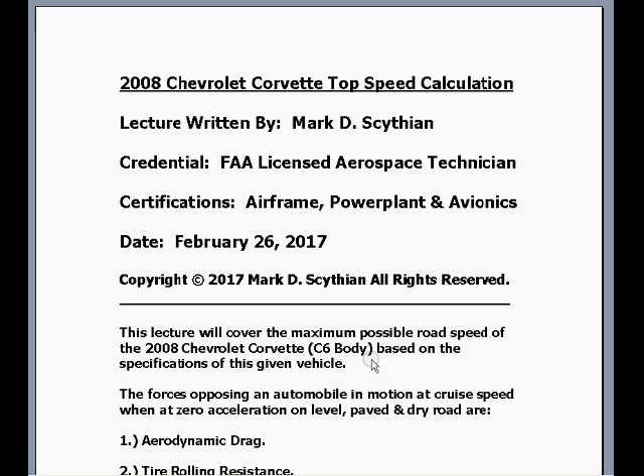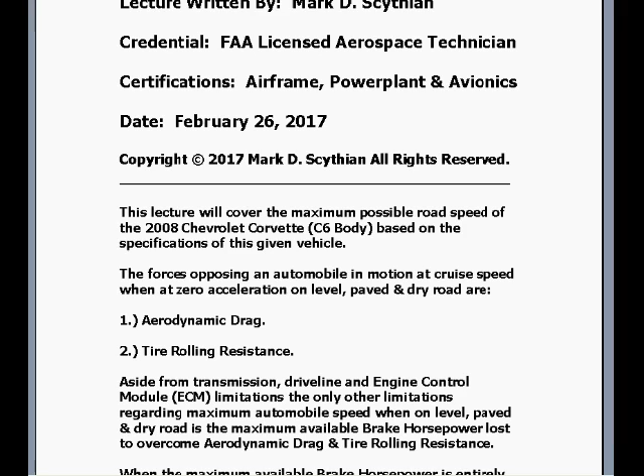The forces opposing an automobile in motion at cruise speed when at zero acceleration on level, paved, and dry road are aerodynamic drag and tire rolling resistance. Aside from transmission, driveline, and engine control module ECM limitations, the only other limitations regarding maximum automobile speed when on level, paved, and dry road is the maximum available brake horsepower lost to overcome aerodynamic drag and tire rolling resistance.

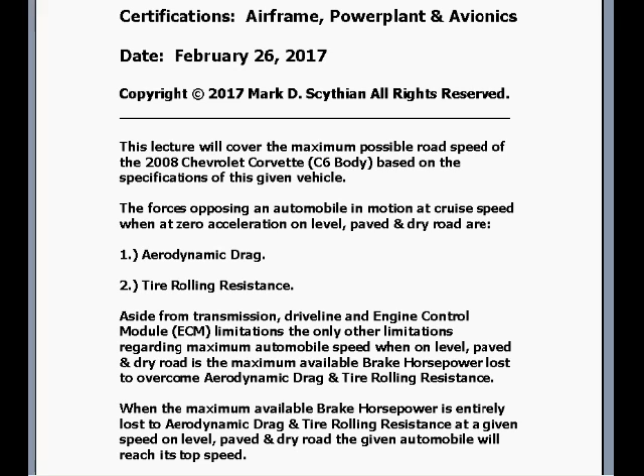When the maximum available brake horsepower is entirely lost to aerodynamic drag and tire rolling resistance at a given speed on level, paved, and dry road, the given automobile will reach its top speed. The 2008 Chevrolet Corvette specifications are as follows.

The 4-stroke gasoline piston engine is a 6.2 liter V-8 LS3 crate engine with a displacement of 6,162 cubic centimeters, cc's, a bore and stroke of 103.25 millimeters by 92 millimeters. There's 25.4 millimeters to 1 inch, so that translates to a bore of 4.065 inches and a stroke of 3.622 inches. The maximum torque output is 424 foot-pounds at 4,600 RPM.

Automobile weight 3,272 pounds. Coefficient of aerodynamic drag 0.286. Projected frontal area 22.3 square feet. The elevation above mean sea level operating condition will be 925 feet above mean sea level in an air temperature of 59 degrees Fahrenheit, 0 mile per hour headwinds, and the road conditions are level, paved, and dry.

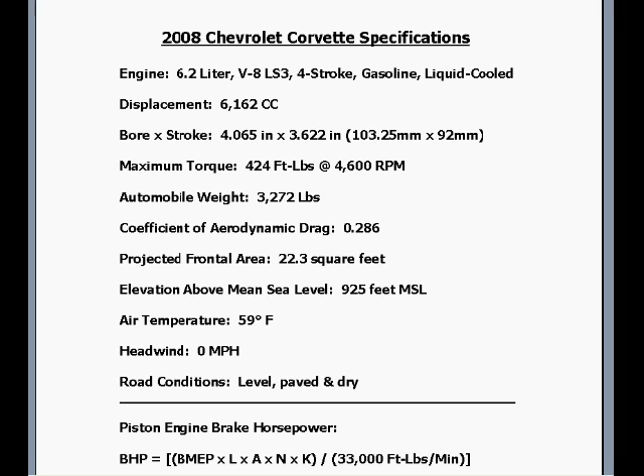So the first thing we have to do is calculate the maximum available piston engine brake horsepower, and the foot-pounds torque at given RPM is directly proportional to the brake horsepower, or the usable horsepower available at the crankshaft after factoring out all friction horsepower losses.

So we would start first with the brake horsepower formula for piston engine, which is the brake mean effective pressure in PSI times the piston stroke length in feet, L, times the bore cross-sectional area in square inches, A, times the number of power strokes per minute, N, times the number of cylinders, K, divided by 33,000 foot-pounds per minute, which is the number of foot-pounds per minute to 1 horsepower. We must use foot-pounds per minute because we're dealing with revolutions per minute, not revolutions per second.

BMEP, brake mean effective pressure, that's the pressure exerted on the piston during each power stroke. And in a 4-stroke piston engine, there's exactly 2 revolutions of the crankshaft for every power stroke. So the power strokes per minute will be equal to 1/2 the RPM. So the brake mean effective pressure in a 4-stroke piston engine is equal to 150.8 times the foot-pounds torque divided by the cubic inch displacement of the entire engine.

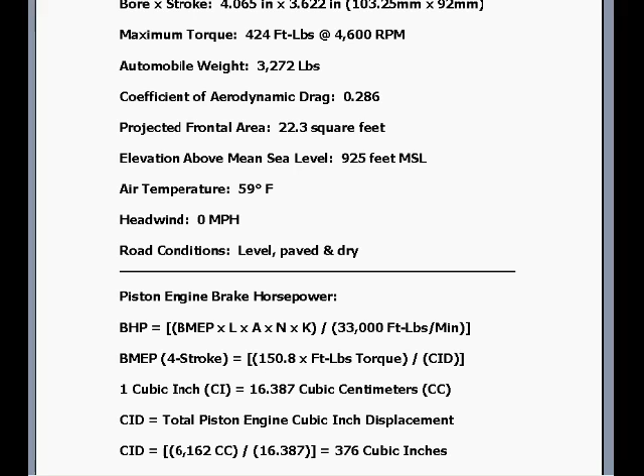1 cubic inch, or CI, is equal to 16.387 cubic centimeters, or cc's. So to calculate the CID, we would take 6,162 cc's and divide it by 16.387. So that translates to 376 cubic inches total engine displacement, which is also equal to 6.2 liters. 6.162 liters to be exact. 1,000 cc's to 1 liter.

So we calculate the brake mean effective pressure for the 4-stroke piston engine. In this case, it's 150.8 times the maximum torque output of 424 foot-pounds divided by a total cubic inch displacement of 376 cubic inches. So during each power stroke at maximum torque output, there will be 170 pounds per square inch of brake mean effective pressure.

Next, we have to calculate the piston stroke length in feet. So we take 3.622 inches piston stroke and divide it by 12. That would be 0.3 feet piston stroke to represent L. The A is represented by the bore cross-sectional area, which is equal to the bore diameter, 4.065 divided by 2 to obtain radius, then squared, then times pi. So the bore cross-sectional area, A, is equal to 12.97 square inches.

The number of power strokes per minute, N, is equal to the RPM divided by 2 in a 4-stroke piston engine. So since we're operating at maximum torque output, which is directly proportional to brake horsepower, we take 4,600 RPM, the RPM in which maximum torque is reached, and divide that by 2. So N is equal to 2,300 power strokes per minute. K is the number of cylinders, in this case 8 cylinders, V8.

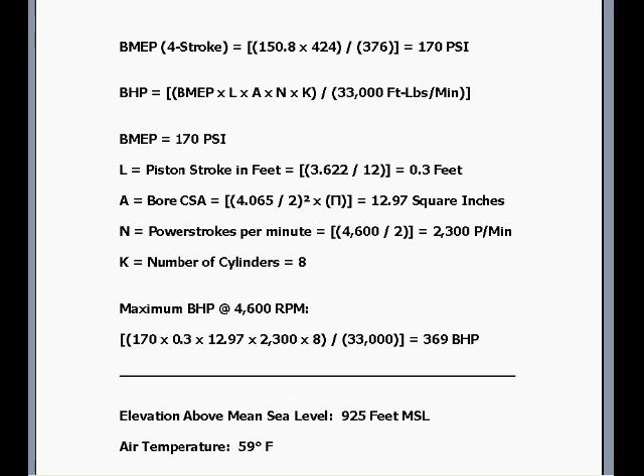So the maximum available brake horsepower at 4,600 RPM is equal to 369 brake horsepower at 4,600 RPM. Next, we use the elevation above mean sea level value of 925 feet above mean sea level. We then enter that into the atmospheric pressure formula between mean sea level and 36,089 feet above mean sea level.

We take the 925 feet above mean sea level, divide it by this value here, then this quantity subtracted from 1, and then this entire quantity taken to the 5.255876 exponential power. That whole value then multiplied times 14.7. So at 925 feet above mean sea level, the atmospheric pressure will be 14.21 pounds per square inch.

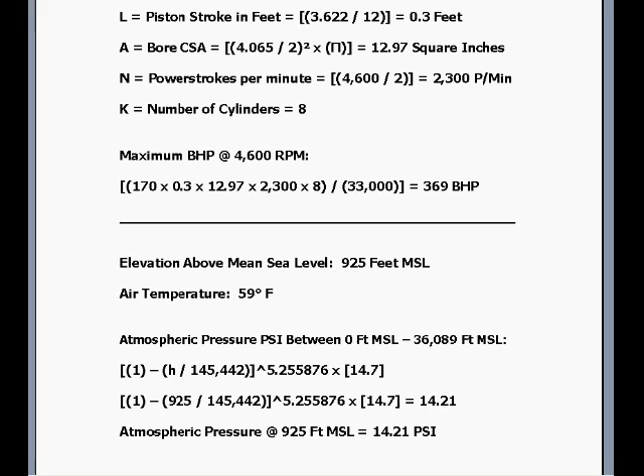Next, we use that information to calculate the air density in slugs per cubic foot, which would be equal to 29 times the atmospheric pressure, 14.21 psi, times 0.031, which is the number of slugs to 1 pound. That quantity then divided into the ideal gas law constant for air, 10.73, times the absolute air temperature in Rankine degrees, which would be equal to Fahrenheit air temperature plus 460.

This entire value then equals 0.00229 slugs per cubic foot air density when at an elevation of 925 feet above mean sea level and 59 degree Fahrenheit air temperature.

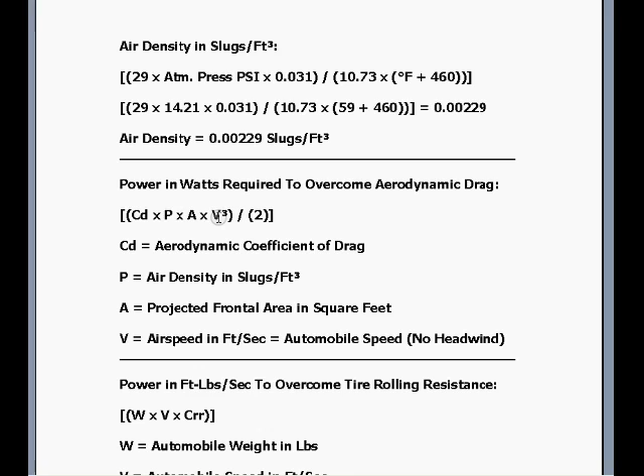Next, we have to access the formula to calculate the power required to overcome aerodynamic drag, and that is equal to the aerodynamic drag coefficient times rho, which is the slugs per cubic foot air density, times the projected frontal area A of the vehicle, times the feet per second speed of the vehicle, assuming no headwind, so that's the airspeed, in feet per second cubed. This quantity then divided by 2.

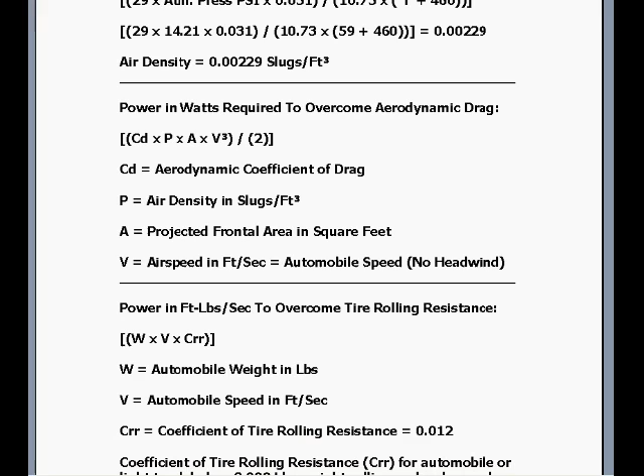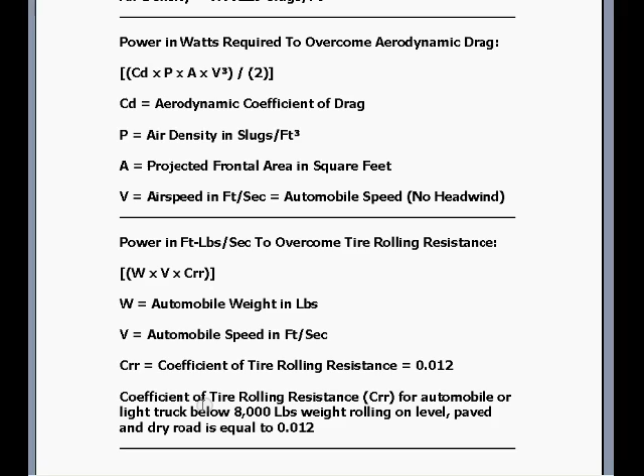Next, we access the power in foot-pounds per second to overcome tire rolling resistance. That would be equal to the automobile weight in pounds, W, times the automobile speed in feet per second, V, times the coefficient of tire rolling resistance. And in this case, an automobile or light truck below 8,000 pounds weight rolling on level, paved, and dry road is equal to 0.012. So when we multiply all that out, we will get the foot-pounds per second required to overcome tire rolling resistance.

To calculate the top speed of this given automobile, the total horsepower lost to overcome both aerodynamic drag and tire rolling resistance will equal the maximum available brake horsepower of this given automobile's piston engine. 1 horsepower is equal to 550 foot-pounds per second of mechanical power, which is also equal to 746 watts.

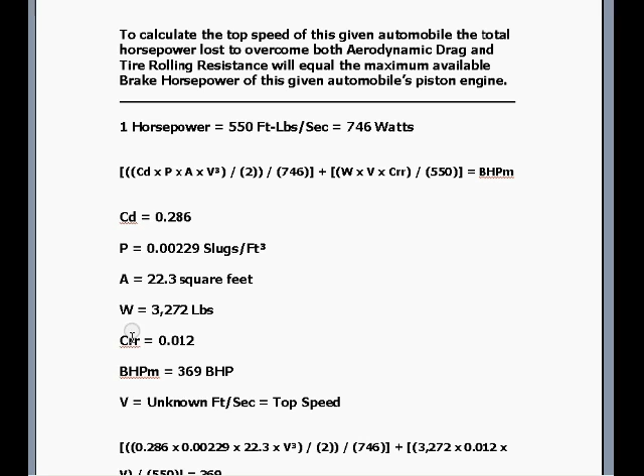So if we set this equation up to figure out what the top speed is, that would be equal to the power required to overcome aerodynamic drag plus the power to overcome tire rolling resistance equal to the maximum available brake horsepower. So we take the known values and we just simply enter them into that established formula. So we know everything but V.

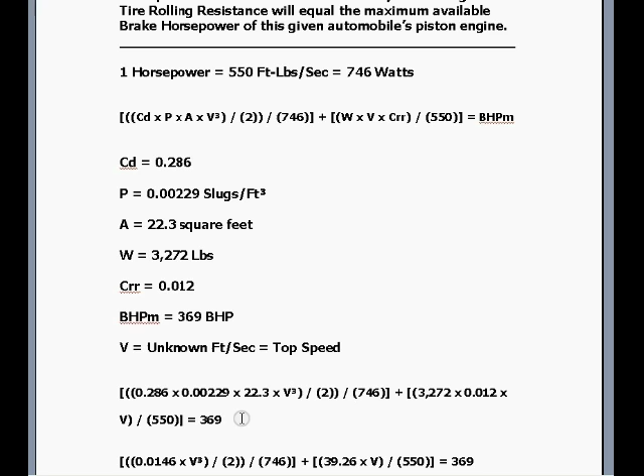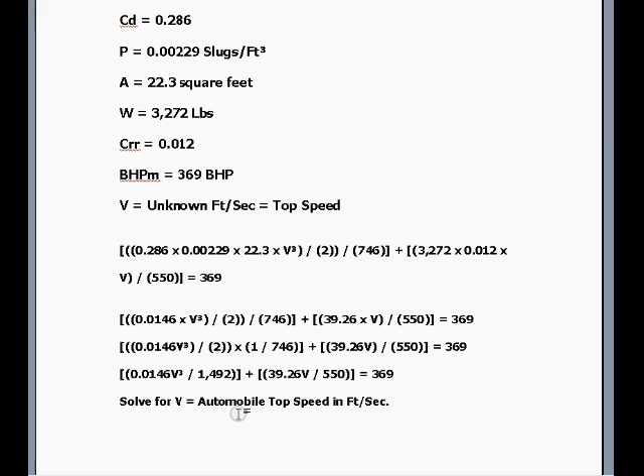Next, we compute what we do know. So when we multiply the knowns, we get the first equation line here. And then as we simplify the double dividends here, we can get the reciprocal of the last dividend as dividing the first value into the other. When we simplify it down, we're left with this neat and clean equation here, which when we solve for V, will calculate the automobile's top speed in feet per second.

So starting at this point now, this equation, when we solve for V, we will calculate the top speed of this given automobile in feet per second. So there are three ways to solve for this equation. If you're really good at factoring polynomial equations longhand, then you'll probably eat this equation right up quickly.

And the second option is to input an approximate top speed intuitively to the automobile. So an automobile like this, the 2008 Chevrolet Corvette with the LS3 crate engine, probably at least 220 miles per hour, if not more. Just an intuitive estimation. So choices 2 and 3 are the fastest method. So let's start with choice 2.

Statistically, most people would want to use 2 or 3, and some people are really fast at longhand polynomial factoring, even with negative square roots and imaginary complex numbers. But we'll just assume most will choose 2 or 3. So we'll start with choice 2.

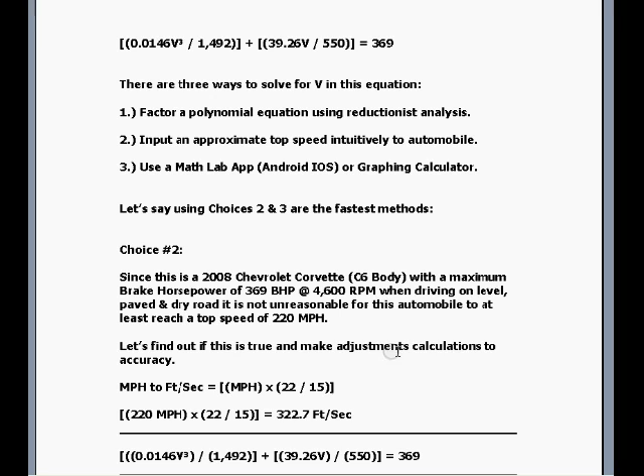Since this is a 2008 Chevrolet Corvette with a C6 body with a maximum brake horsepower of 369 brake horsepower at 4,600 RPM and driving on level, paved, and dry road, it is not unreasonable for this automobile to at least reach a top speed of 220 miles per hour. Let's find out if this is true and make adjustments and calculations to accuracy. I call it adjustment calculations to accuracy.

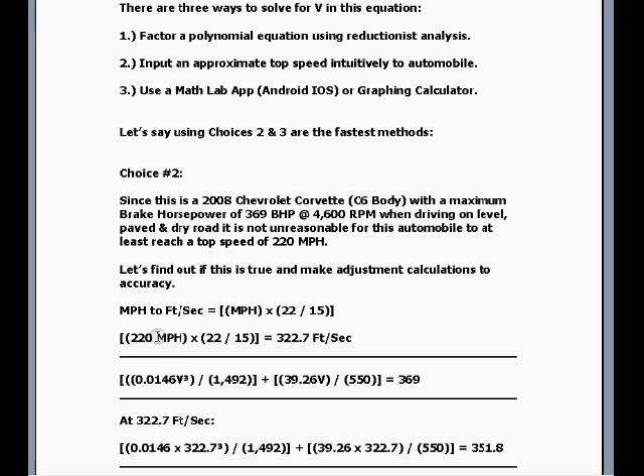So miles per hour to feet per second is equal to miles per hour times the ratio of 22/15. There are 22 feet per second to every 15 miles per hour. So we convert the 220 mile per hour estimation to feet per second. So 322.7 feet per second is our first estimation value.

All we have to do is substitute that in for V. We have two different V's, but they're both feet per second, equal to each other. So we can solve for both V values in these separate equations because the units are identical. So when we do so, 322.7 cubed times this constant divided by this dividend, added to the same value here, we get 351.8. So we're a little low. We need to reach 369.

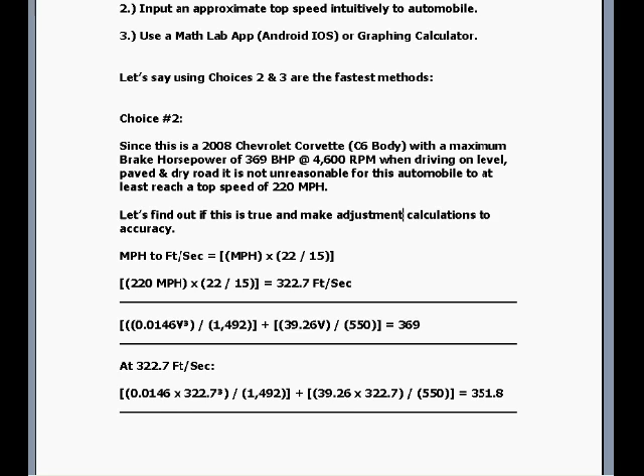So we'll try again. We'll go up a little higher from 322.7 feet per second. Let's try 325. Same process, we just enter them in by substitution. We have to reach 369, so it's still a little low, so we'll try again. 368, very close, pretty much the right answer. We'll go up by 1/10 of a foot per second, 0.1. And when we do so, we get a perfect match, equals 369. So 369 to 369 is 0. At 328.1 feet per second, this is where this given automobile will reach its top speed.

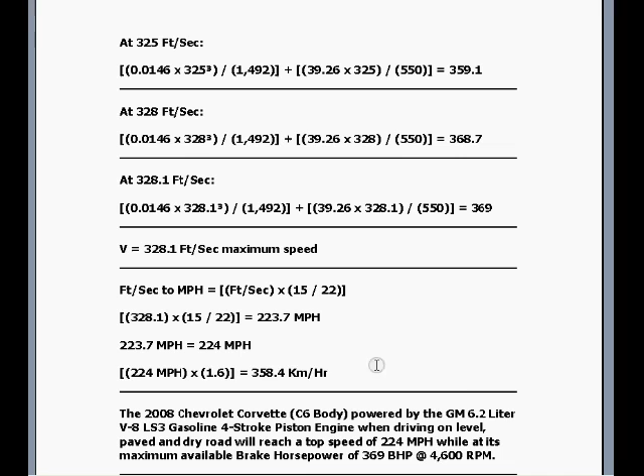So then we can convert the feet per second into miles per hour. In this case, it's 15/22 times the feet per second to get miles per hour. So in this case, it's 223.7. We rounded up to 224. So the top speed of this given automobile is 224 miles per hour. And if you need that in kilometers per hour, that's 224 times 1.6, 1.6 kilometers to 1 mile. So 358.4 kilometers per hour, or 224 miles per hour, is the top speed of the 2008 Chevrolet Corvette.

So the final answer here is the 2008 Chevrolet Corvette with a C6 body powered by the GM 6.2 liter V8 LS3 crate gasoline 4-stroke piston engine, and when driving on level, paved, and dry road will reach a top speed of 224 miles per hour while at its maximum available brake horsepower of 369 brake horsepower at 4,600 RPM.

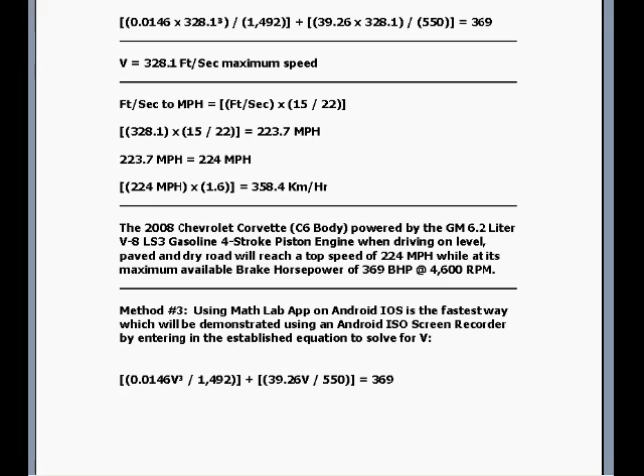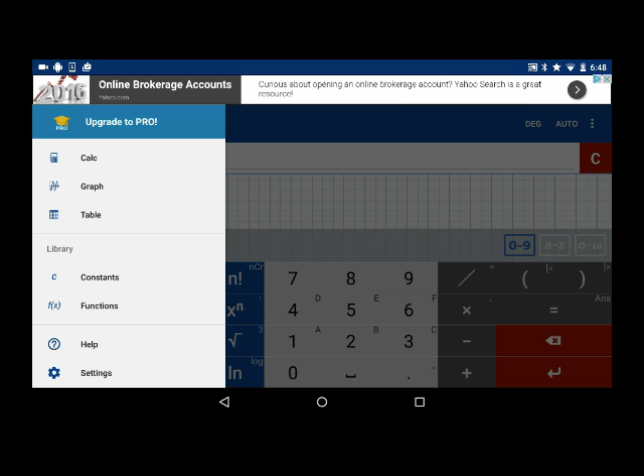Now method 3, we can go over to the iOS Android screen recorder now. You can either use a standard graphing calculator, or if you go to the Google Play Store and download the MathLab app, you can actually have automated problem solving in real time. You do need an internet connection. So if you click on the calc function here, you can just go ahead and enter that equation, which when solving for V establishes the top speed.

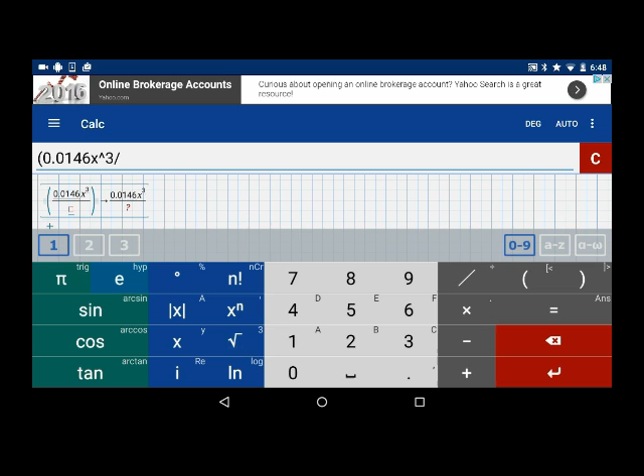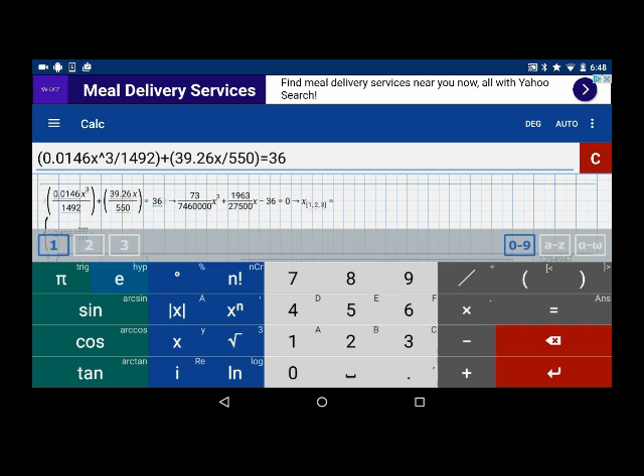We can substitute using x for v. So 0.0146 x cubed, representing v cubed, divided by 1492, close parentheses, plus 39.26 x, representing v, divided by 550, close parentheses, equals 369 maximum available brake horsepower, enter, and then it will actually solve the polynomial equation longhand in an automated sense with the internet interface.

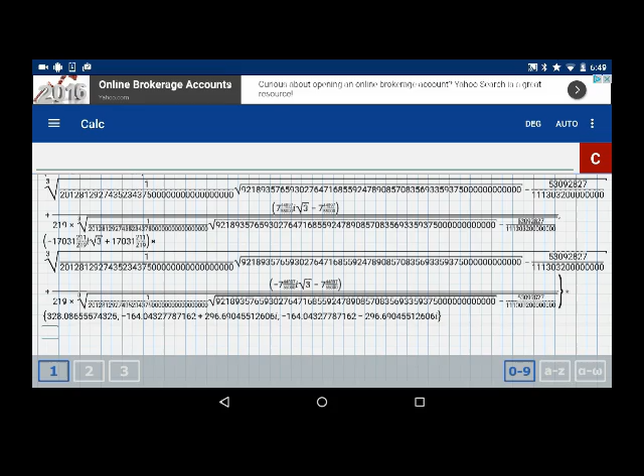So there's a lot of imaginary roots, as in negative square roots, in the equation, so you have to use the integer, no imaginary roots and no negative values. So 328.0865, 328.1 feet per second. So this is like the fastest way to solve it if you use the MathLab app.

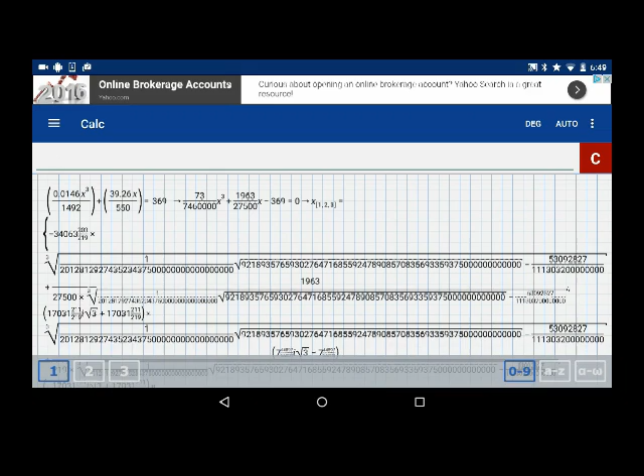So after entering that equation through the MathLab app on Android, iOS, or on a graphing calculator, you can quickly calculate what the V component is, and in this case, of course, we matched 328.1 feet per second as the maximum velocity, and then when entered into that equation down here, we calculate that the total is equal to 369 brake horsepower required to overcome both tire rolling resistance and aerodynamic drag. So 369 minus 369 equals 0, so that mathematically proves the top speed of this given automobile is 328.1 feet per second, or 224 miles per hour.

And that's on the assumption that there are no lockouts on the electronic control module, transmission, and drivetrain to maintain street legality. But assuming that's not occurring and it's strictly overcoming aerodynamic drag and tire rolling resistance, the 2008 Chevrolet Corvette, the C6 body, powered by the GM 6.2 liter V8 LS3 crate 4-stroke gasoline piston engine, when driving on level, paved and dry road, will reach a top speed of 224 miles per hour while at its maximum available brake horsepower of 369 brake horsepower at 4,600 RPM. Thanks for watching this video and have a great day.